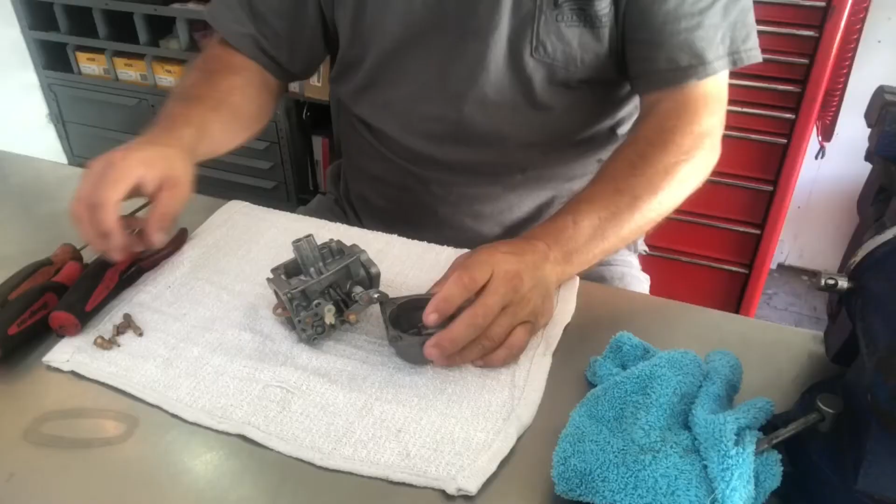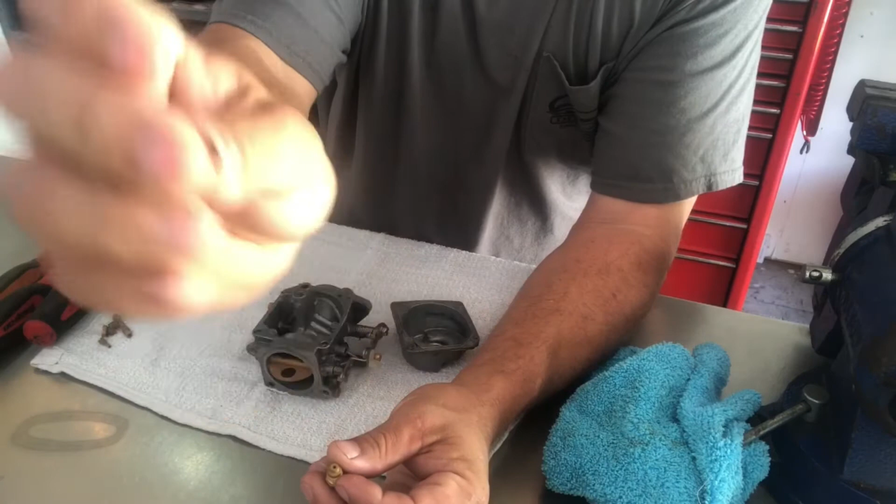Okay, the first thing I'm going to show you, the O-ring for the needle. If you're doing this for yourself, you see how flat this O-ring is? It needs to be replaced. It's not a usable piece. We're not going to run this carburetor, so I'm just going to put it back together.

What would happen by using that O-ring is that the fuel pressure builds up behind the seat and literally seeps past the seat, and at idle it might cause you an over-rich condition. So that's why we replace this O-ring if we were going to run this motor. It's just demonstration purposes only. We're just trying to show you guys what you're looking for and how to put these back together the way I like to see them done.

Give it just a little tug, nothing crazy. Remember, we're using that socket. Here we have our low-speed jet. We're going to reinstall this. I use this tool. It fits it pretty well. This is a stainless screwdriver. I have ground the tip down to fit into the jet. This tool here fits it extremely well, as you can see.

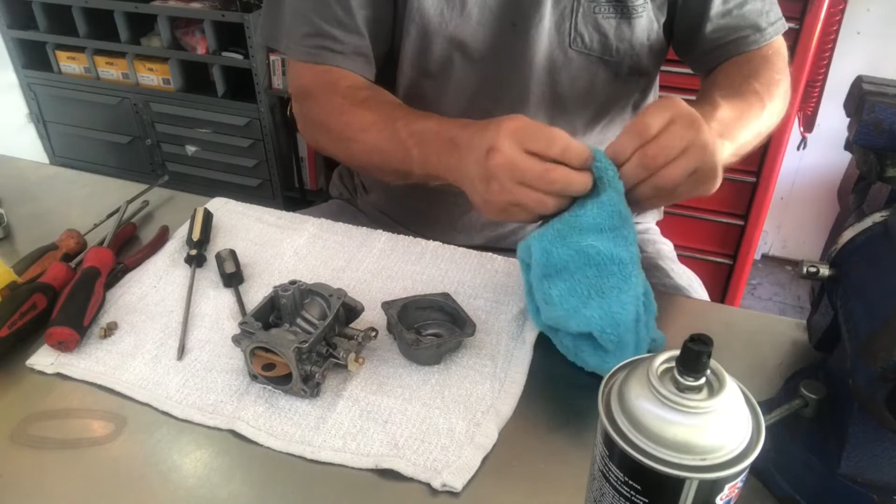Our emulsion tube, as you can tell, it's got a little lint on it. Lint is sticky. At this point here, it goes inside the throat of the carburetor. That's our stop. A lot of times on a really dirty carburetor, when you pull these out, you're going to find a lot of debris or trash up in this area right here. You have to make sure you get all that out. That's why, to me, it's important to tear this carburetor all the way down as far as you can get it.

Okay, now we're going to install our high-speed jet. It's the jet that we use when we're going fast. Of course, high speed, right? I'm going to put a little shot of oil in the threads. You don't need to do this. I do this because I have a high cringe factor. When this screws into here, it's like fingernails on a chalkboard for me. I'm sorry.

Hang on, we have to get the right screwdriver. See how our screwdriver fits in there nice? That'll help keep you from tearing the ends off this jet and making it unusable next time.

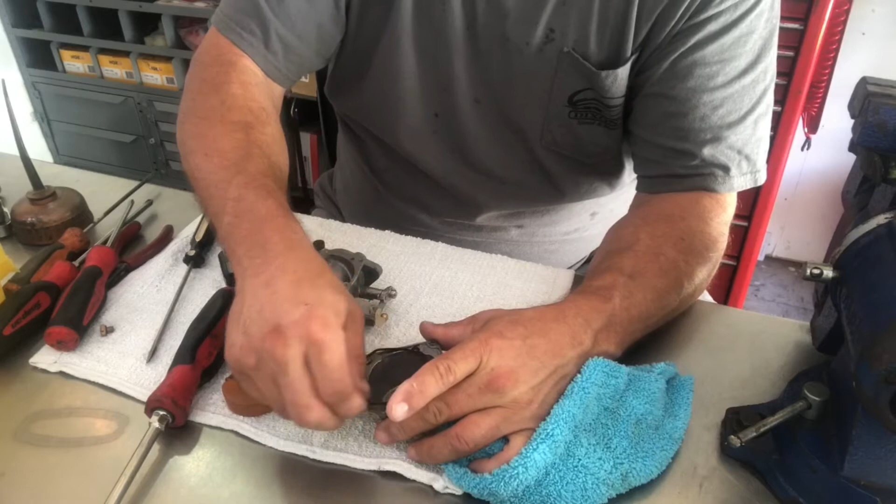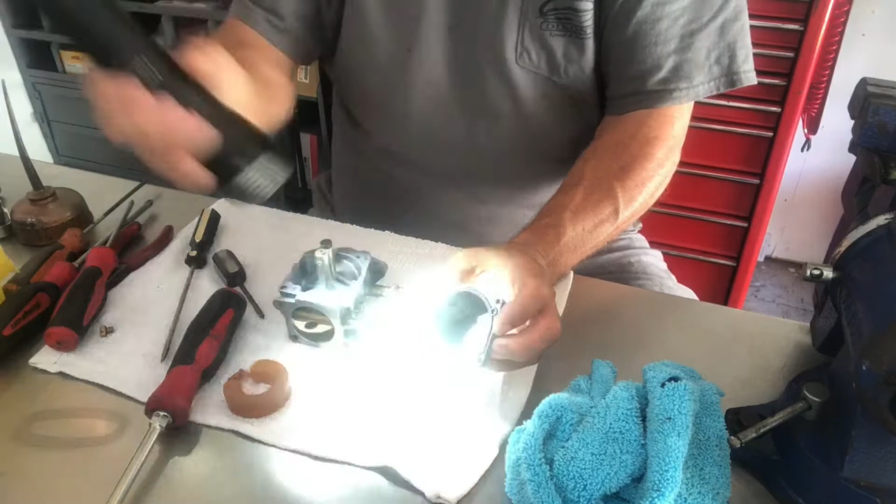Now, sometimes these are hard to get back in their little spots. I like to use grease to make it tacky so it sticks in. And on rare occasions, I will use 3M weatherstrip adhesive, the yellow Gorilla Snot, as we like to refer to it. You see down the carburetor bowl, I put some light to it. Too much light to it, maybe.

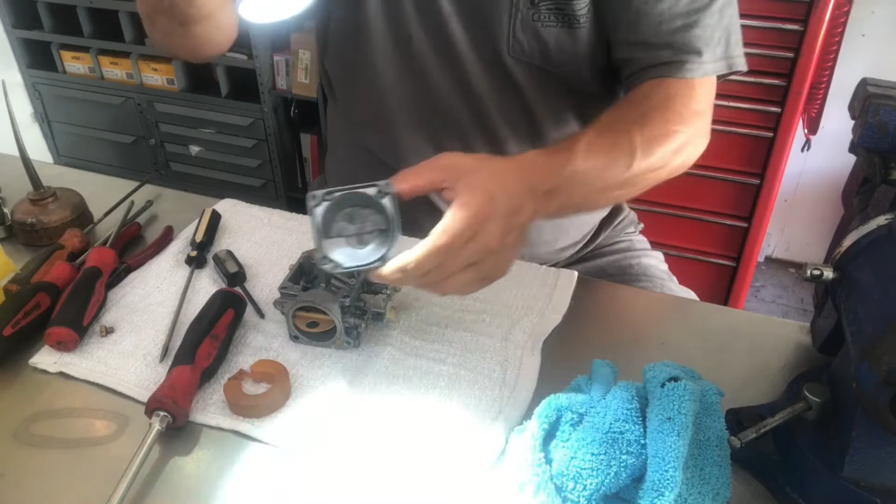What the stink? That sucks, huh? Oh well.

See the carburetor bowl? Believe it or not, it's pretty clean. The discoloration, I'm not happy with that, but that's the way it was. We're gonna have to use it.

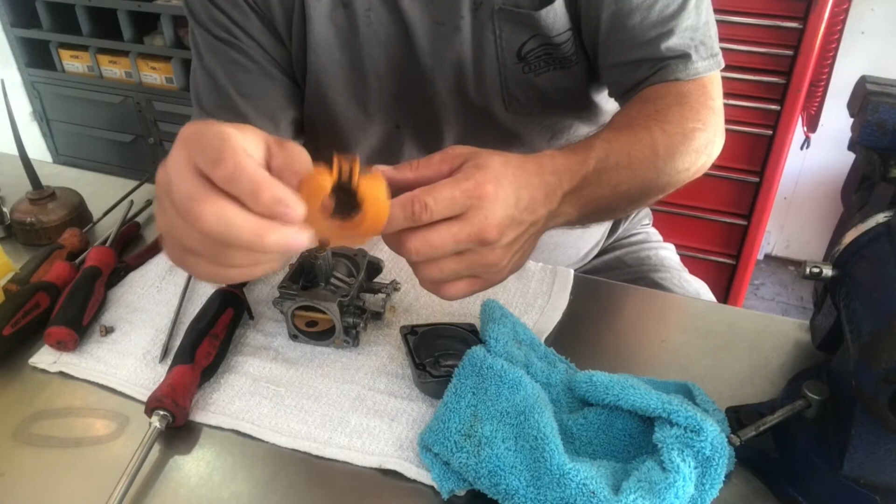Our float. Now, I put it through the ultrasonic cleaner only, just to get it somewhat clean. Then I wiped it off with a rag. I'm gonna hold this up to light and check for any type of water inside here. Also, give it a little shake. Nothing's inside this one. This is good to use.

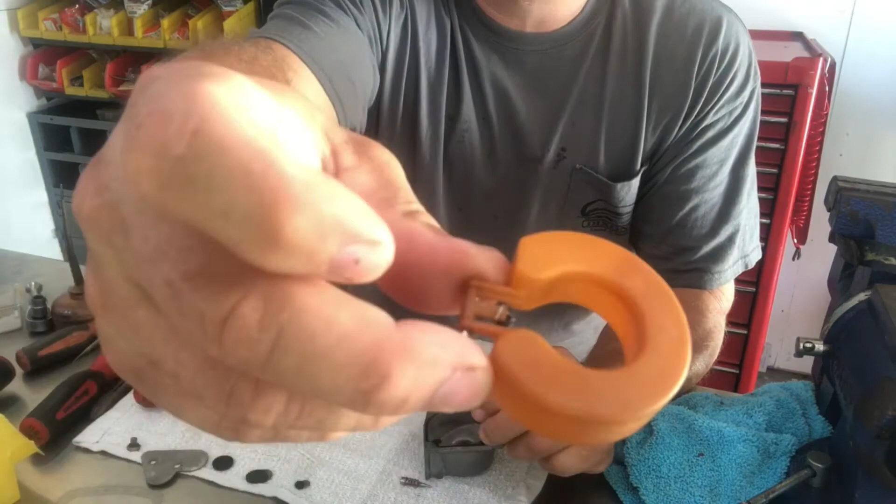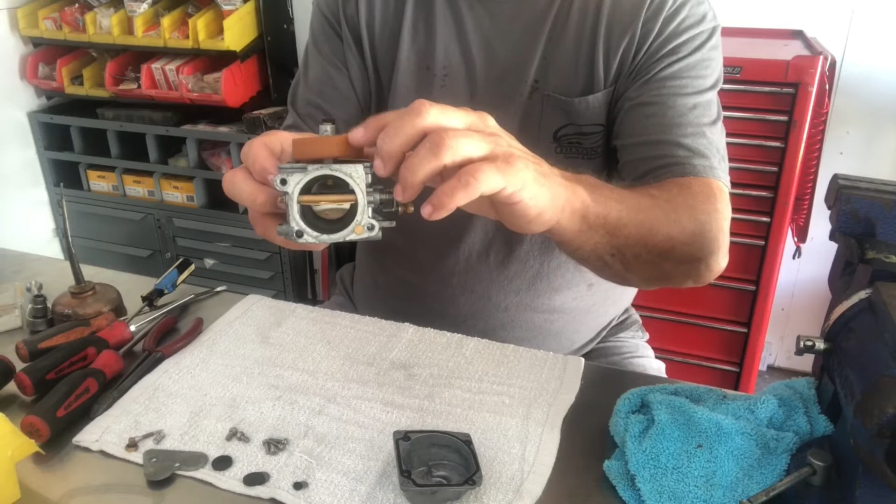Let's put our float and our needle seat in. That clips on just like that. Notice how our float's just about parallel with the base, where the bowl goes in. That's what we want. We want it parallel or just slightly elevated. Our float drop looks good.

Now we can install our bowl. Like I said, if we're doing this for a customer, we're going to replace this bowl gasket for sure. This one, to me, is not a usable piece.

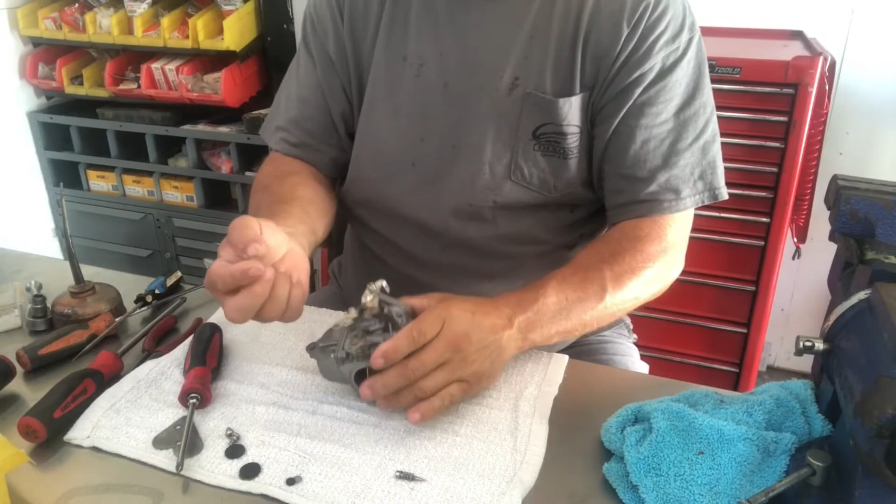Our bowl drain, there again, notice it's all clean, no trash or anything inside of it. Basically the way this works, you see the O-ring on it, right? This is designed to drain the fuel without having to pull the plug all the way out. So when you back this off, fuel should be able to drain out of the bowl without this screw being out. Like in this position, we should be able to drain our fuel. And in this one, no leaks.

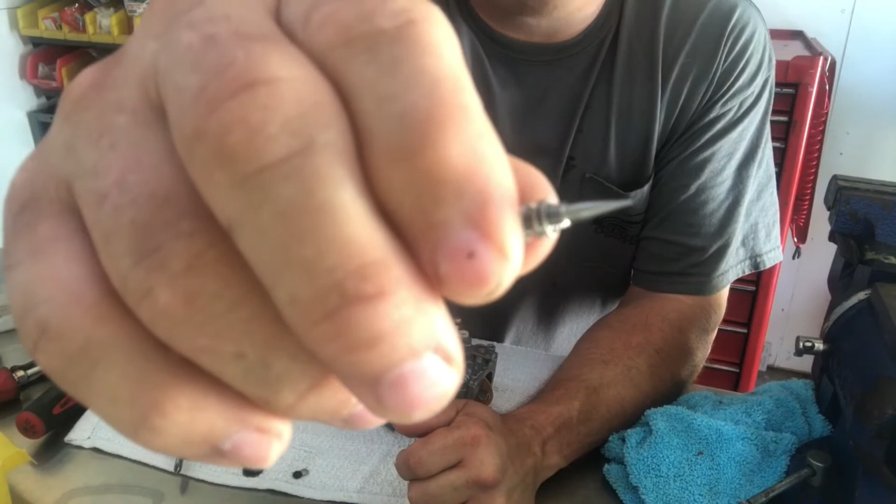We're going to install our idle mixture screw. We're going to check for pits, a little grooving at the tip. Honestly, this looks very good. We're going to reinstall this. We'll twist it in until it lightly seats. Right there, see, I'm only using 2 fingers. I'm not trying to crank that. Now we're going to back this out 1.5 turns. I do everything in half-turn increments. It helps me.

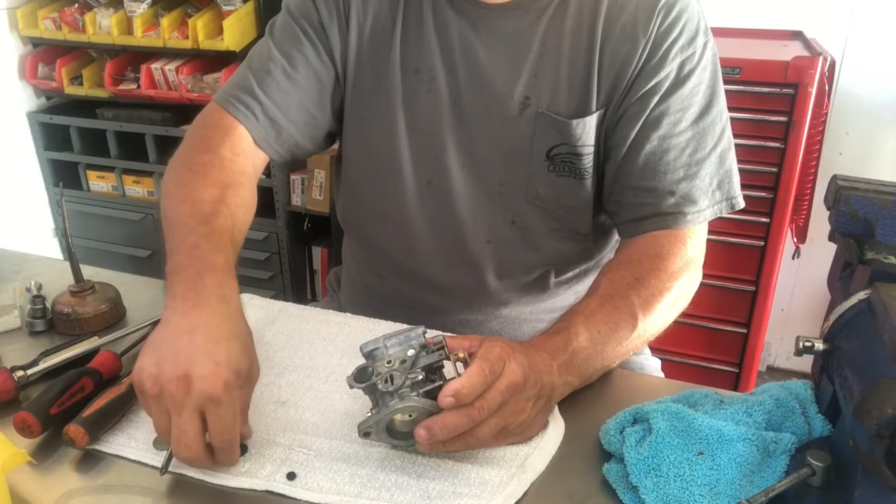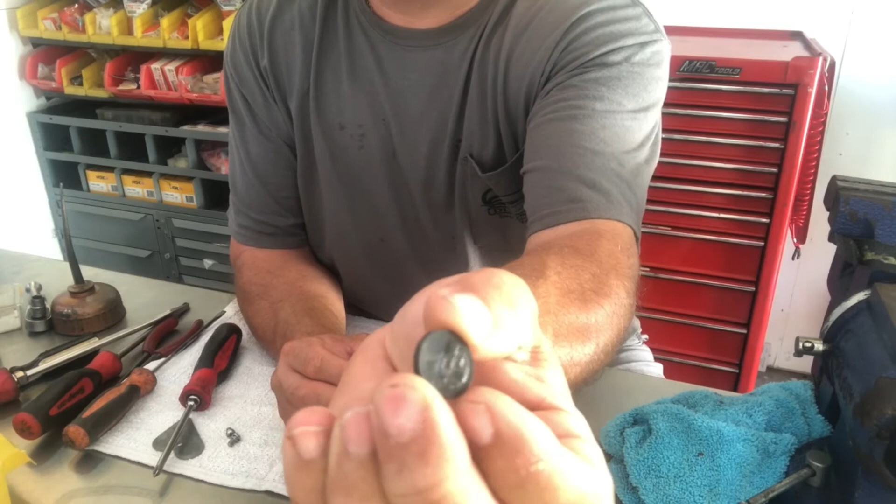All right, now we're going to install our top plate. Stainless steel went here. Stainless steel went here. Thin rubber here. Here's something else I'd like to point out to you. See this rubber? See how you can see the imprint from the top of the carburetor? It'll probably be okay, but we're going to flip this over so this is at the top. But normally I would replace this. I'm going to install our cover.

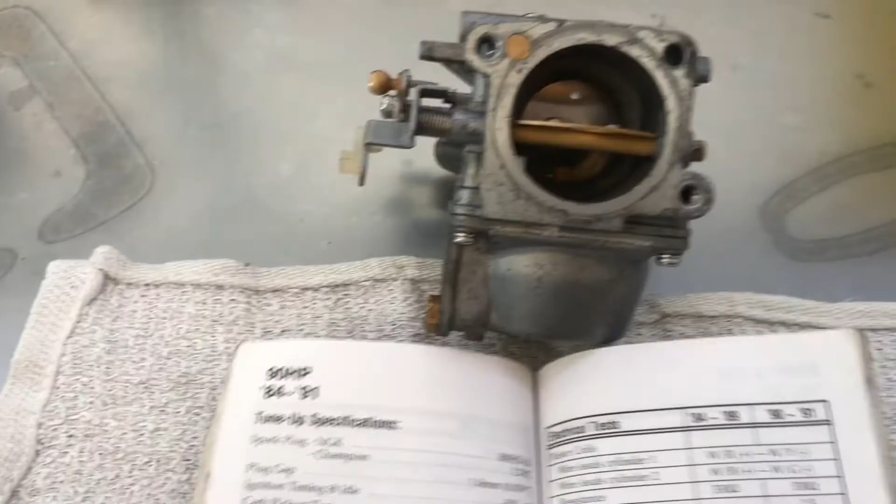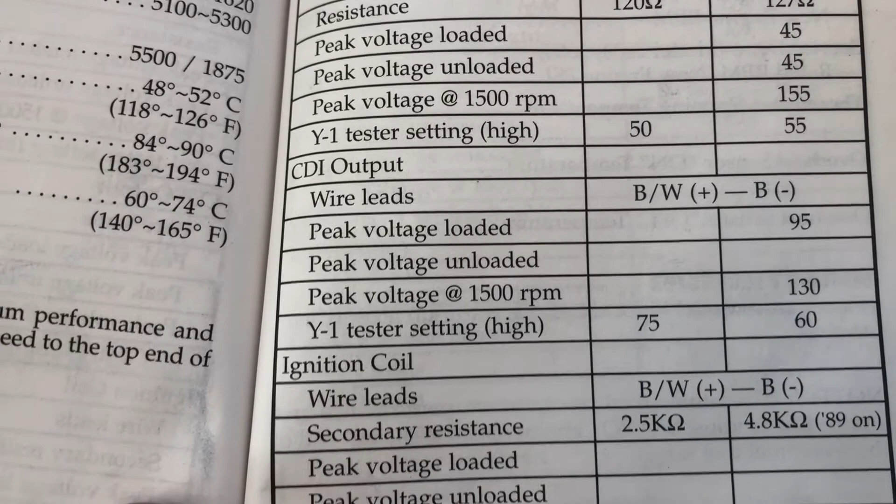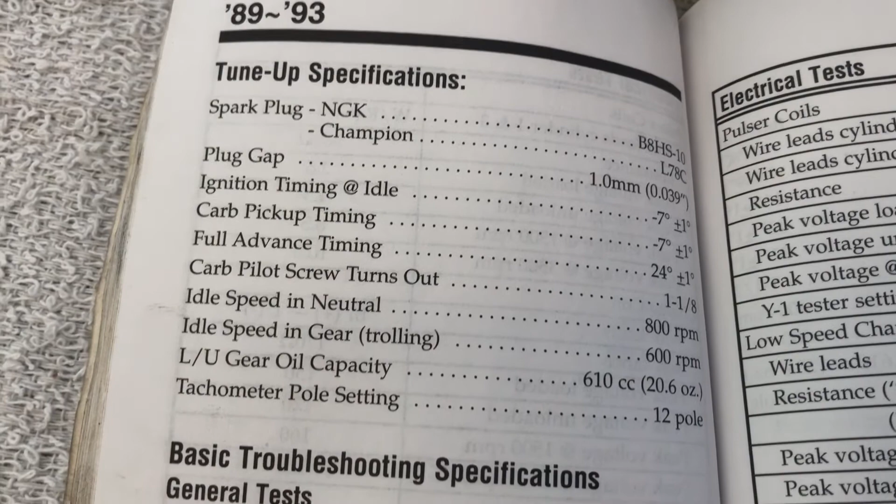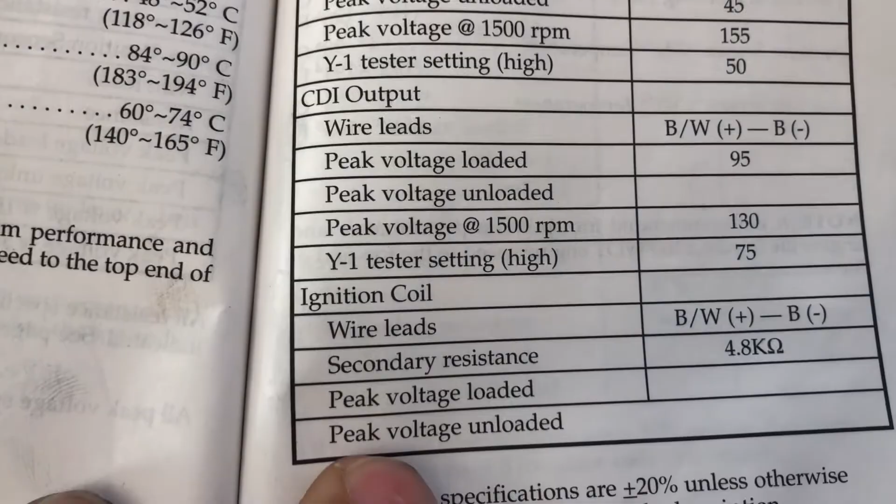So let's look at our specs in our book. It's for the 84 through 91, 90 horsepower. I'll scroll the whole page in case anyone has this particular motor. Now, here are the C85 specs, which this could be. So basically we're going to stick with the 1.5 turns out that this carburetor had on it.

So we'll pick this video back up, install the carburetor on the 90 horse. See you then.

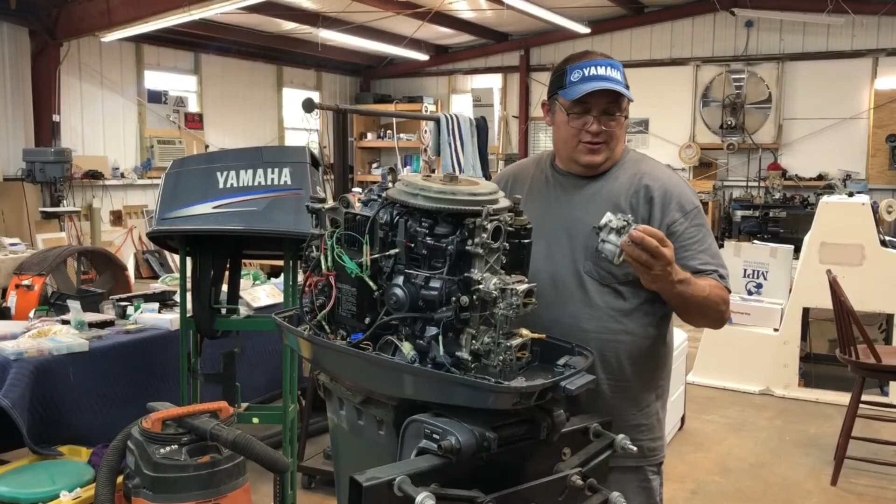Okay, so this is the carburetor we rebuilt earlier. We're going to reinstall it on the motor and go through the linkage. Our fuel line, slide it on the studs.

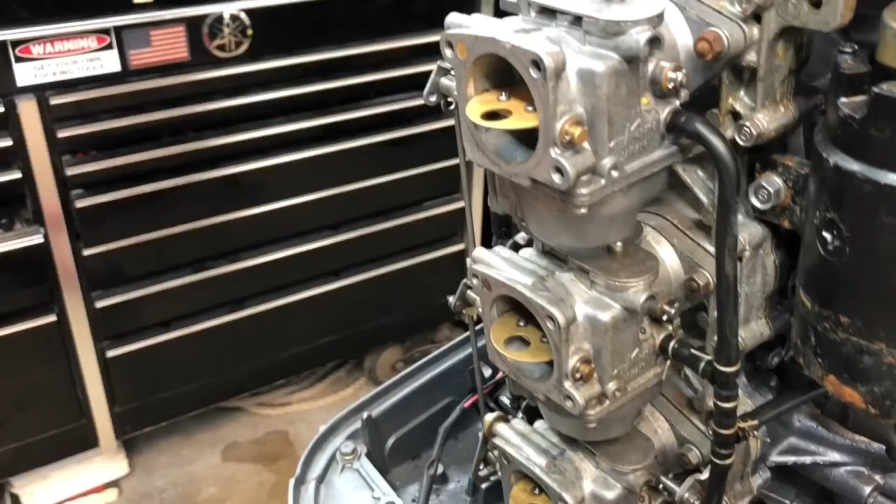You want to go snug, not too tight. 10 millimeter usually fits all Yamaha carburetors. Okay, we're going to adjust the carburetors now. The first thing we're going to do is take off the throttle rod. Pull the cam back so I can pull the throttle all the way back to dead idle.

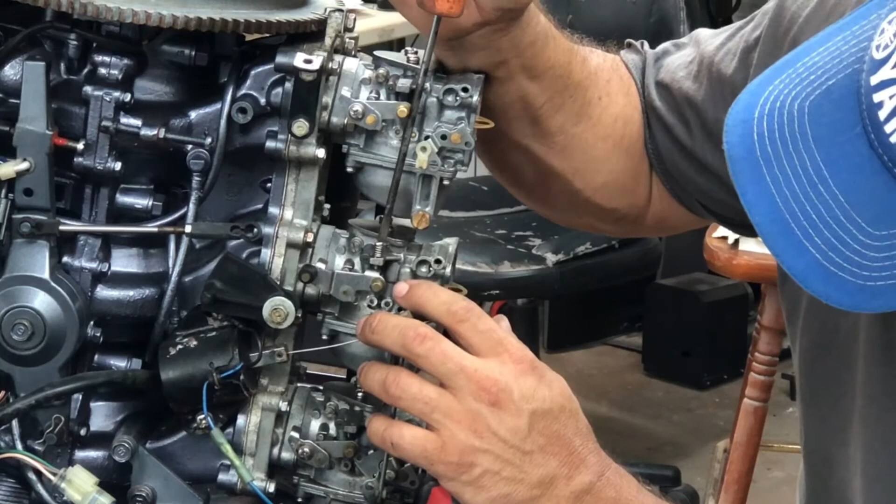This is our idle adjustment screw. We're going to count how many turns back before it's not touching the butterfly. I got 2 turns, and I have clearance between the screw and the stop right here for the idle adjustment. We'll install our linkage rod.

Loosen up both of our adjustment screws. These are our butterfly adjustment screws. If you notice right here, this is the butterfly movement right here. This is my linkage arm. So I'm going to bring my linkage arm all the way back and my butterfly back. That way both of them have tension on them. I got the screw, that one's all set. Same thing here, watch. I'm going to pull that back. Check our linkage, make sure it moves freely, everything's good.

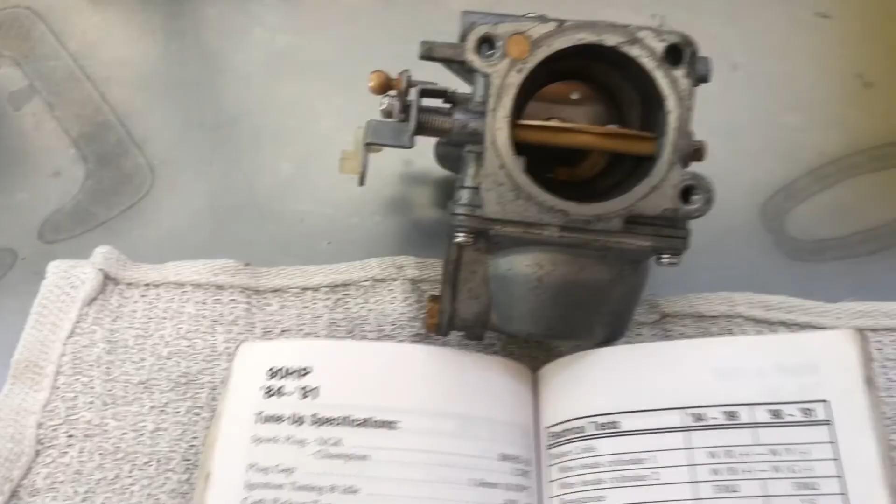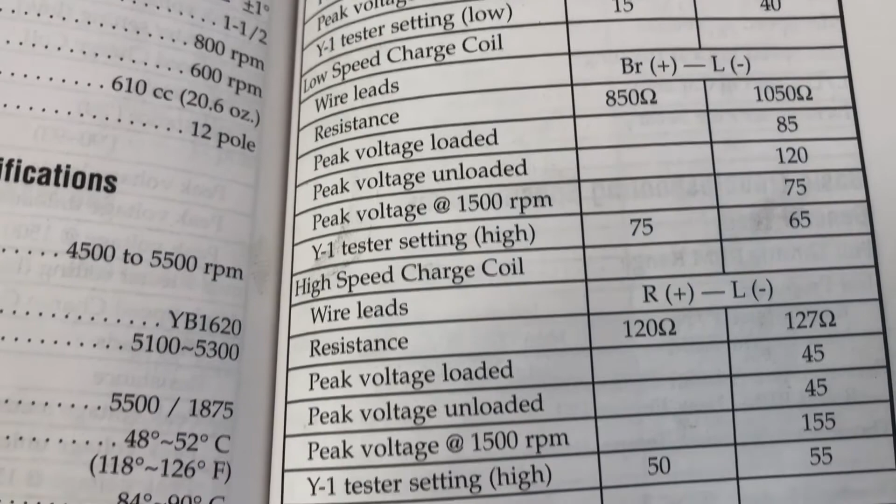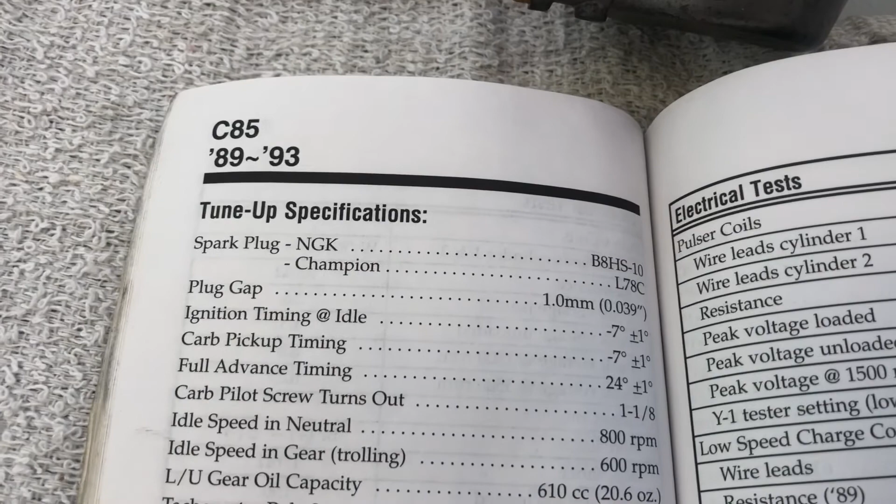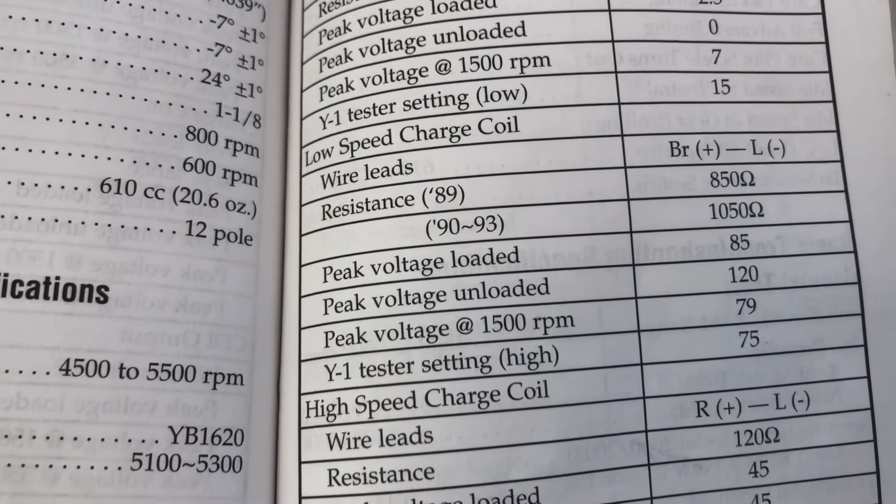So let's look at our specs in our book. It's for the 84 through 91, 90 horsepower. I'll scroll the whole page in case anyone has this particular motor. Now, here are the C85 specs, which this could be. So basically we're going to stick with the 1.5 turns out that this carburetor had on it.